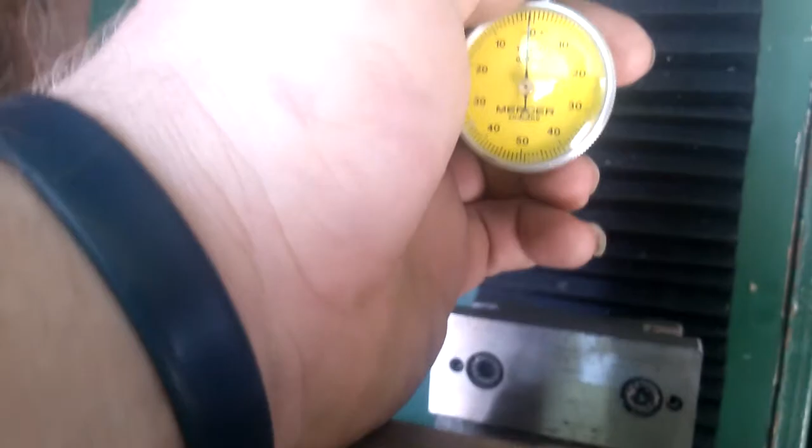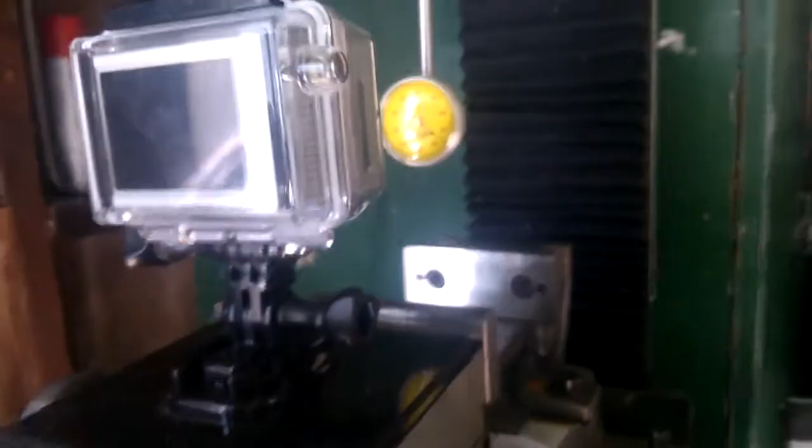But before we do that, I got to set up the vise. The vise needs to be aligned with my gauge here. This gauge is actually a metric gauge. Doesn't matter if it's metric or standard American. It'll still work as well, because all you need is to sit on 0. So I'm going to set up the GoPro, and hopefully this will get the right angle, and we'll go from there.

Okay guys, I've got this set up. Basically what you want to do is we're going to come in here. See, I got a wrench around here, that's the right size. It'd probably be better to use that. Alright. We're just going to snug that up. Just enough that it'll still rotate, but it won't move. Like it'll still allow this whole unit to rotate. It just won't move back and forth.

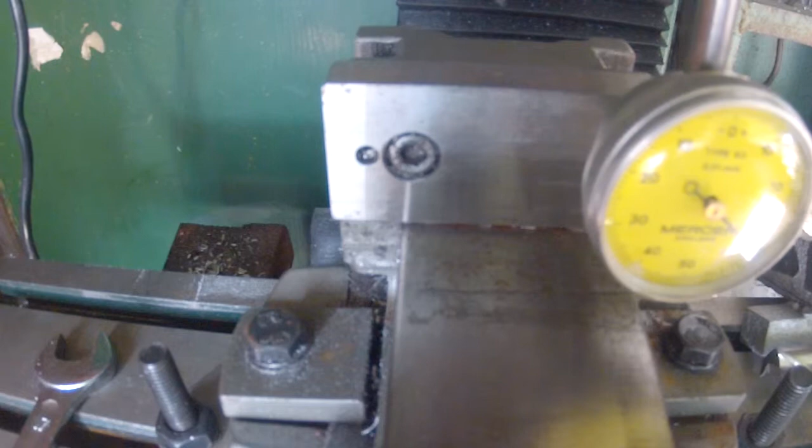So now we move into the jaw. Now I'm trying to do this around and through the camera, so please bear with me. We got 0, and then we feed across, and this is going to be really out of whack. Oh, see, we're even off the gauge now. Not a big deal. Now I'm bringing it to 0. Don't forget here, this is our locked point. So if this side was further back, it means this side is also further back, because this is our pivot point. Go back.

Okay. And I'm going to bring this table back out. And we're at 0. Alright, something you might notice, every time I come back to this point, I zero it. I don't zero it over here. It's really your own personal preference. I find that zeroing it on one spot, checking it, bringing it back, is usually the best way to do things. If you choose to do it a different way, I'm not telling you that you're doing it wrong. This is what I like to do.

Oh, way too far back. All right. Now, as you can see, we're getting really close. Just a quick thing about this gauge. It is in metric, like I said. Each one of these, like the 10, 20, that's 1/10 of a millimeter. So if I were to bring this gauge all the way around, that would be 1 millimeter.

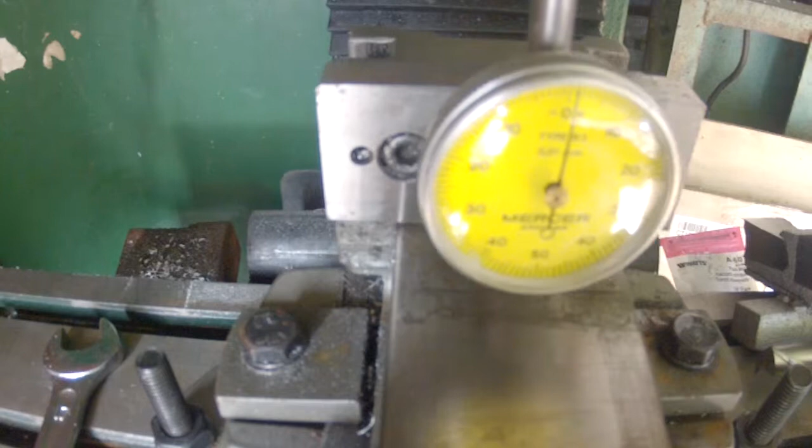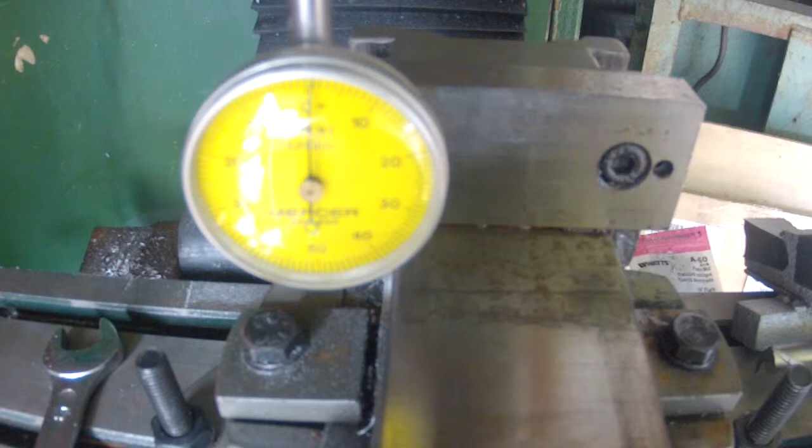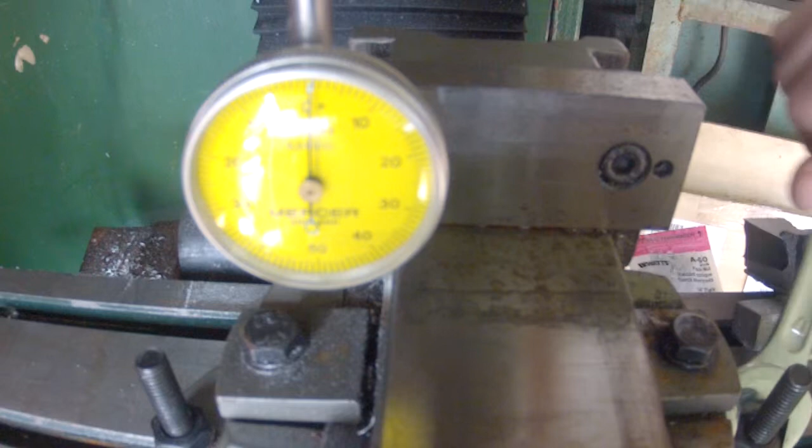Alright, we are less than 0.01 of a millimeter off from about 100 thou to 100 thou in. And this is a 3-inch jaw. So, that seems good enough for me. I'm going to put the tooling in, and I'm going to put the workpiece into the vise. Oh, actually, before I do that, not quite done here. I get ahead of myself sometimes. Alright, that's tight.

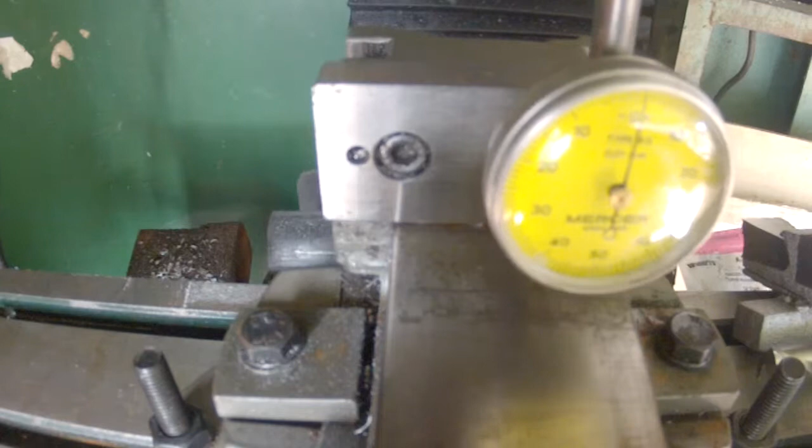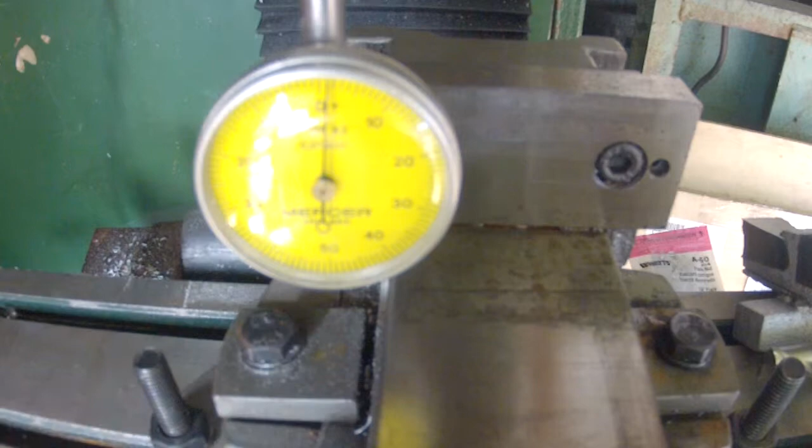That's 0. Just over 0.01. All right, it's good enough for me. Just a quick note before we get started. The 0.01 of a millimeter that I was off by is less than half a thou, just under half a thou. So, pretty accurate. I got some crud on there.

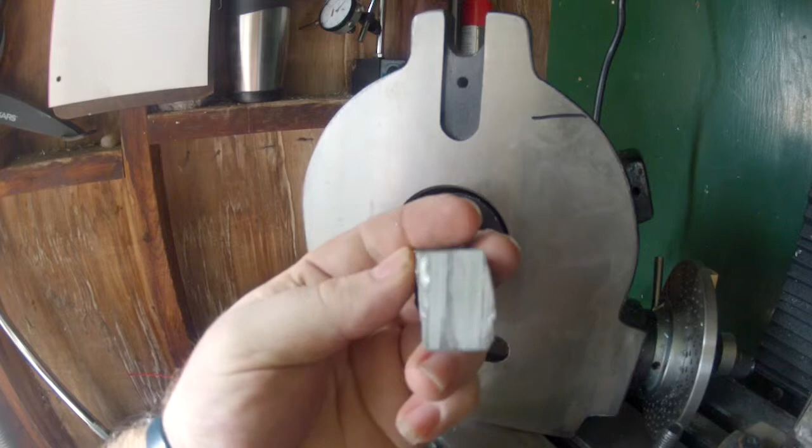Okay, so the plan today is to take a couple scraps here that I've cut off. And what I'm going to make are blocks that will sit in these slots. You know, one there, and then I'll just use one of these for this slot. These ones are pretty straightforward. All I got to do is make them the right size on the top and then flip them over, make them a different size. As you can see, maybe, I have my sizes here.

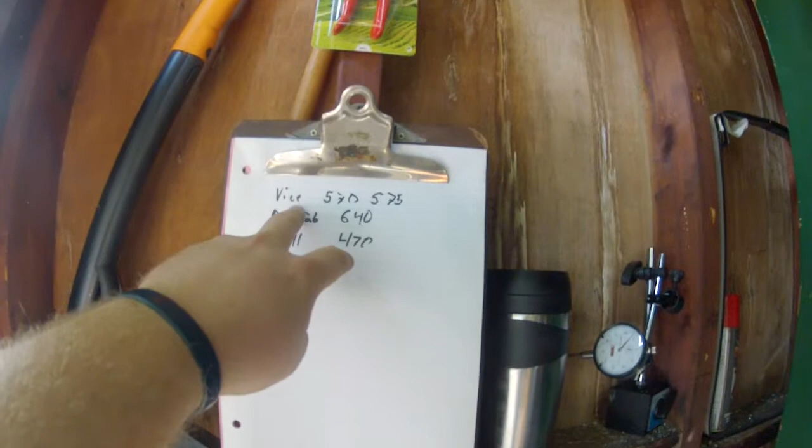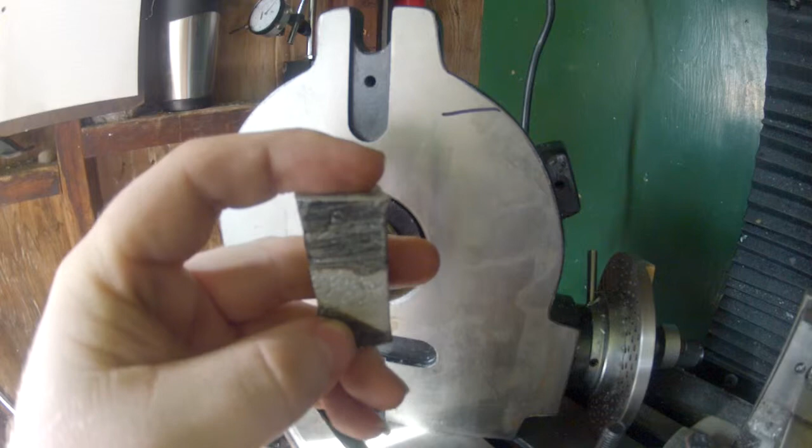The vise is not exactly straight, so I'm going to have to do a custom one for that. The rotary table, all of these are precision milled to 640 thou. And then my mill table, the width of these T-slots is 470 thou. So it'll just be a case of machining a large size for the top and a narrower size for the bottom.

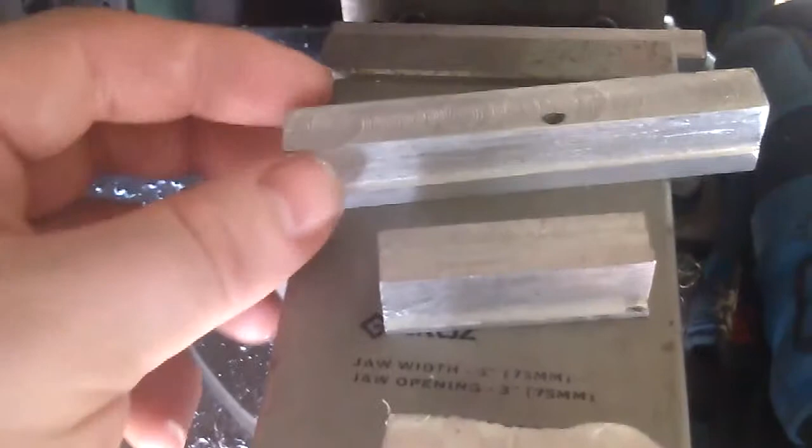Alright guys, as you can see, I've got two of them almost finished. This one is completely finished, and I'll show you over here. It slips into the slot, and actually I gotta get my little pry bar in here to pull it out. And it also fits, oh, it did fit, here we go, fits in there.

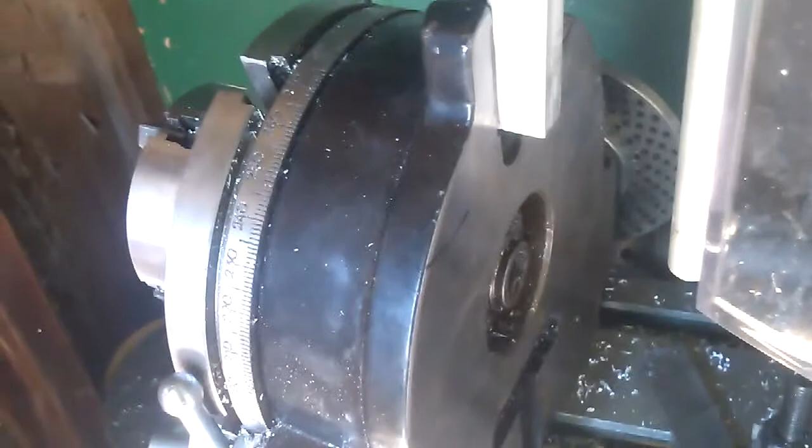A little bit of sanding just to finish it off. It looks really rough because I have filed it, and my file is not all that great, but just a little bit of sandpaper. I have some 320 emery cloth that I'll use for that. This one actually fits a whole lot nicer in these slots. It sits down in there. There's absolutely no movement. There's only maybe 1 to 2 thou of clearance, so it sits in there real nice.

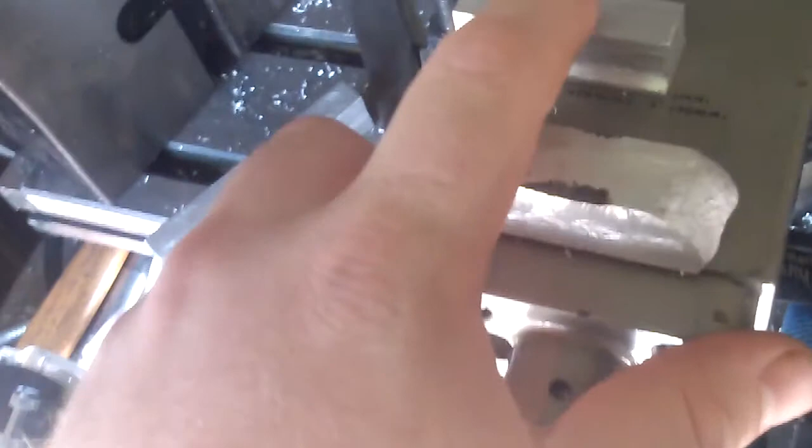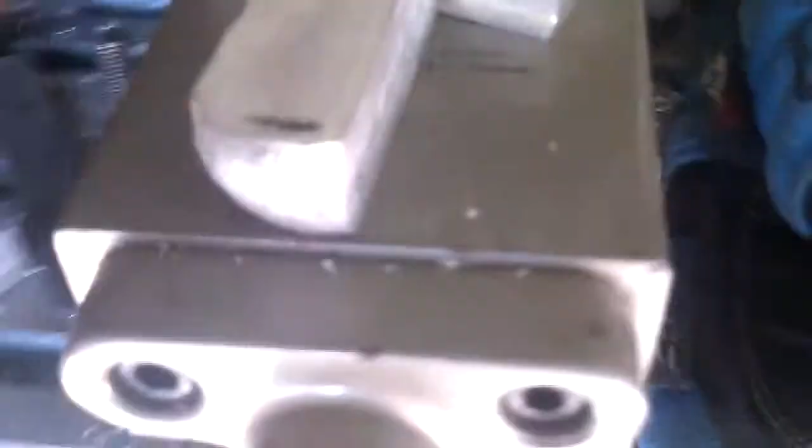Now, this guy here is going to be almost the exact same as this guy to fit in this bottom slot. This started off as a rough piece of aluminum. I've basically cleaned up the 4 sides, not the ends, not yet anyways. And this is a saw cut, that's why it looks a little weird. But as you can see, just by sheer chance, it is almost the right height.

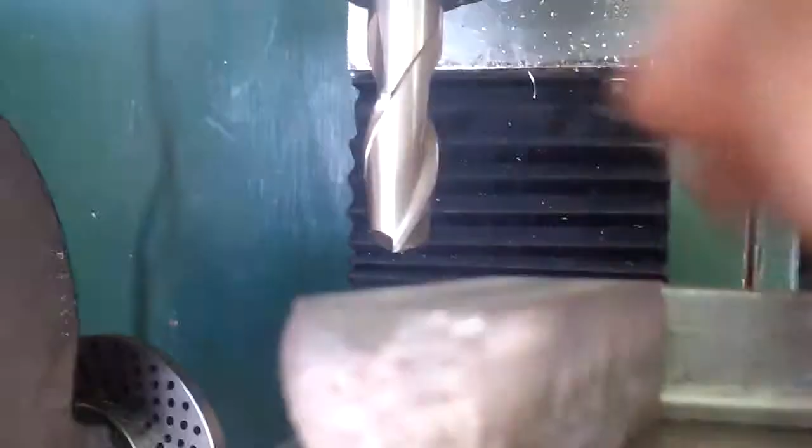Move this up a bit. You can see it's off by maybe 20 thou, 15 thou. And that's good enough. So all I've got to do is create the profile so that this piece looks like this piece. And there we go, it focused.

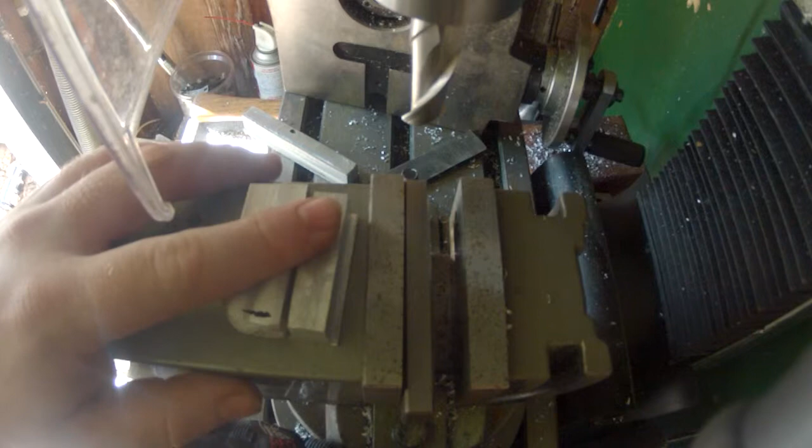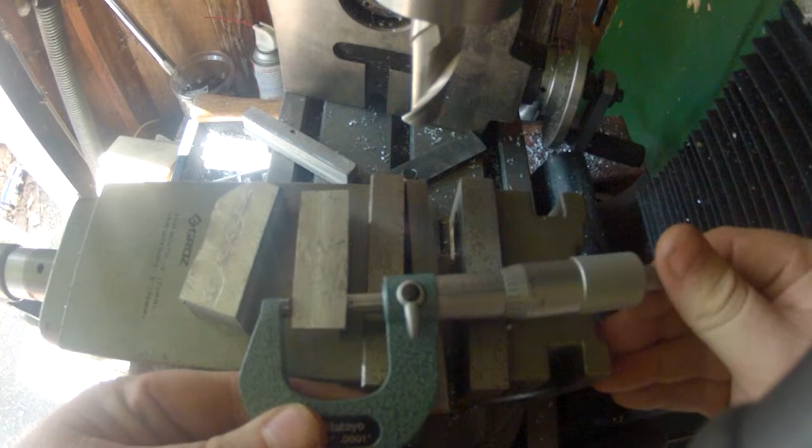Alright guys, we're going to start off by doing a little bit of measuring, figuring out what I need to do. So, I already know the heights are okay. I might put this through a little pass if it doesn't quite fit in the slot right. I'm working around a whole lot of stuff here, let's move that out of the way. First, I'm going to measure this. I'm using the micrometer here because I want to be a little bit more precise than I am usually with the Vernier. 633.5.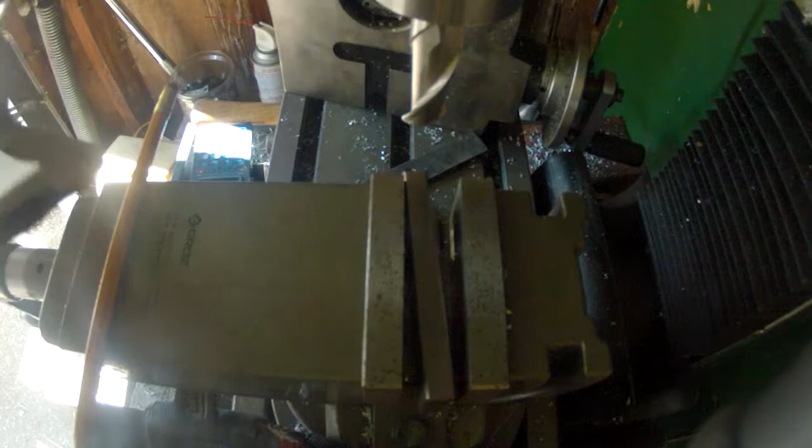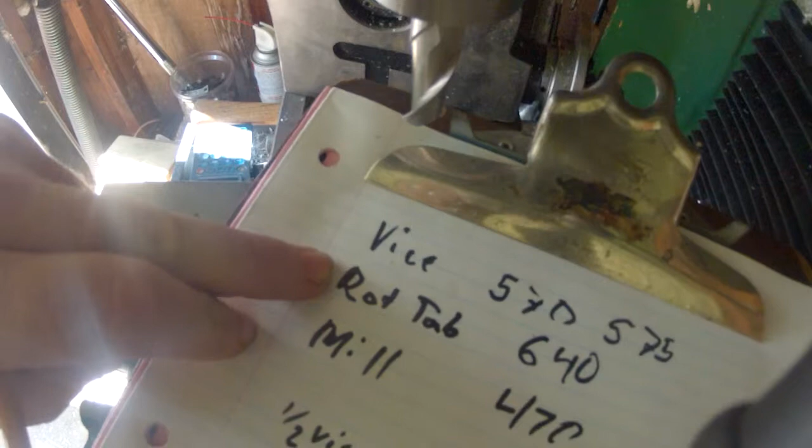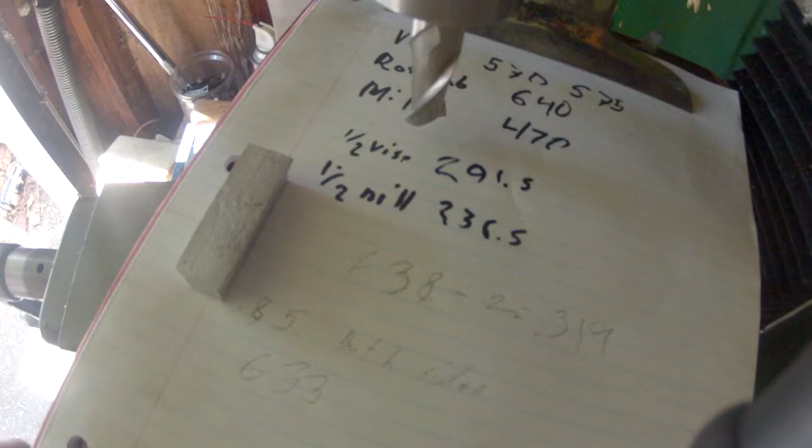And I need to do some math, so I'm going to write this down. Alright, so you can see we got 633. I know it's a little difficult to see. The initial measurement of my rotary table was 640. That was with the Vernier. And the end size ended up being just a little bit smaller. So now, where did my micrometer end up? I dropped it somewhere. Here it is. I didn't drop it. I set it down gently. We got, if I can get this thing to open up far enough, we got

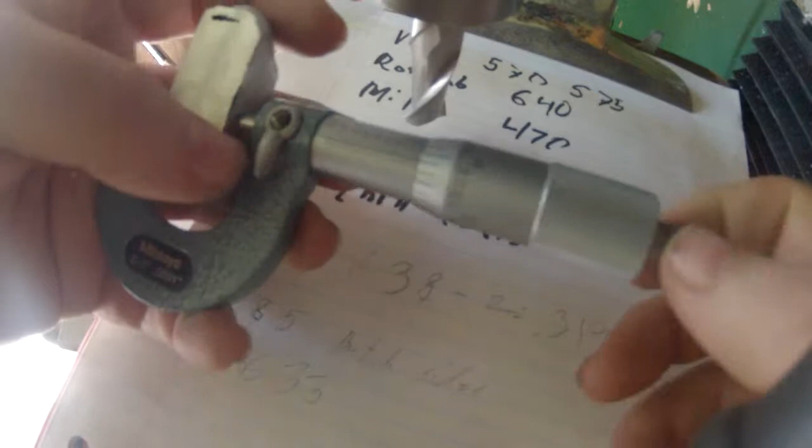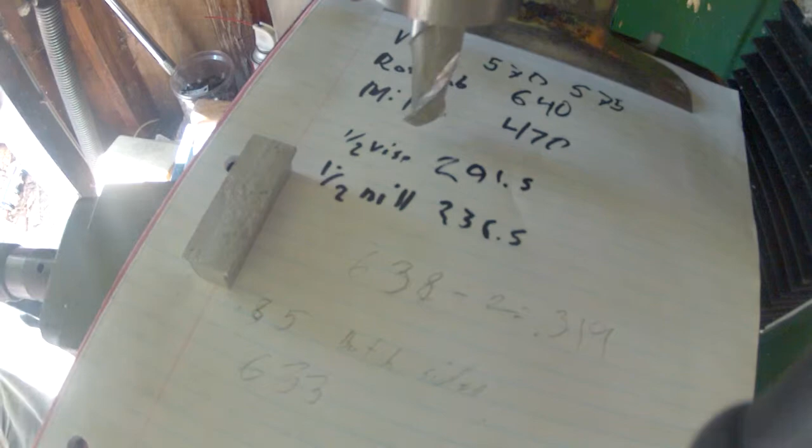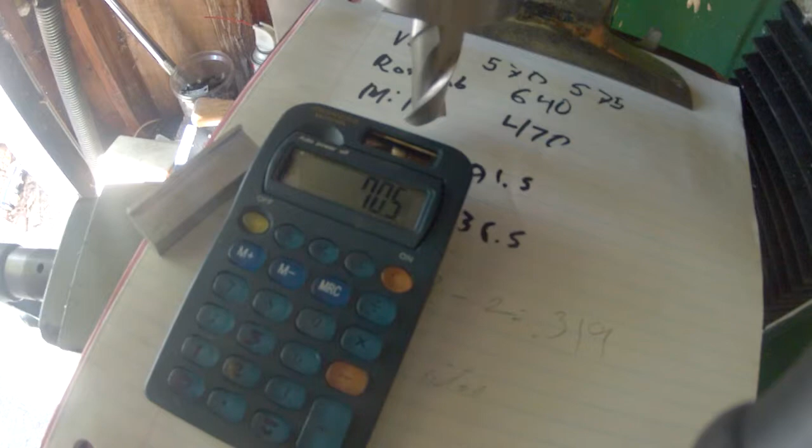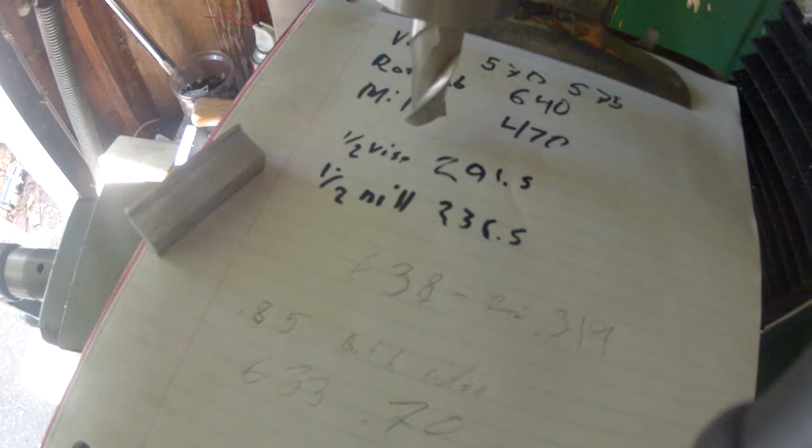775, 774. Okay, so since I'm completely inept at math, we're going to go over here. 774 minus 633, 141 divided by 2. I hit the plus, but it's close enough. So we need to take off 70 thou. And I'm going to write that down. 70. Oh, that's wrong. That should be a 0. We need to take 70 thou off of each side in order to get the large end of this piece that will fit into my rotary table.

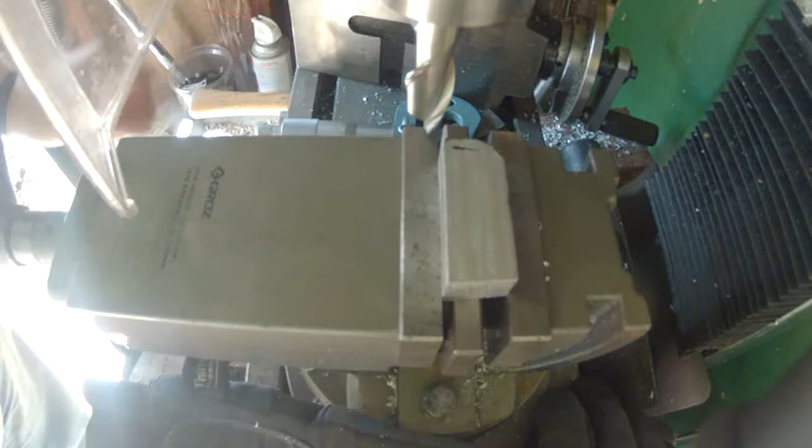Pop this in. Close that up. Now, what I'm going to do is I've got to come in and over, and I've got to make sure that this is all locked up. Okay. And we're going to come down till this is really close to touching. Doesn't need to be real close. Technically, it only needs to come down just a little bit more than this little lip right here. But I want as much clearance as possible. All right.

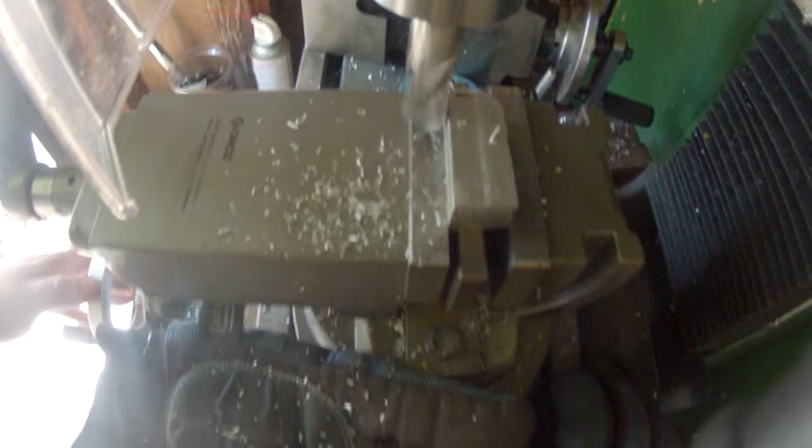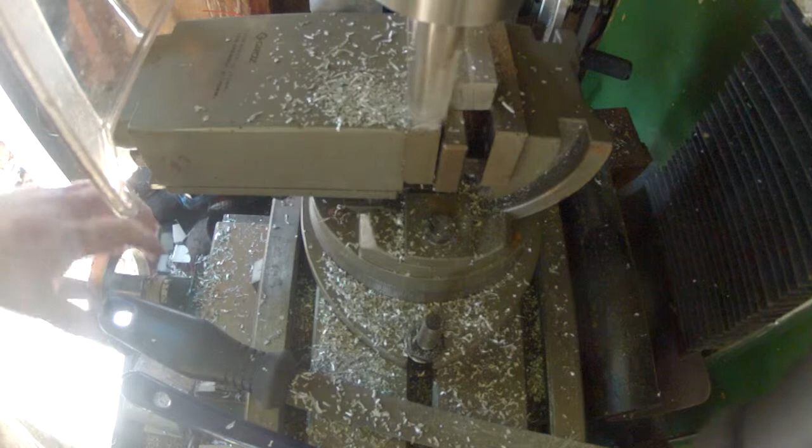Now, start it up. And we're going to come in until we just touch, actually. A little marker on it. We're just touching. Now we have to do the exact same thing on the other side. Throwing stuff all over the place here.

Alright, now we take a measurement, and it should be right around 630. Alright, what do we got? 628. That should be okay. Let's see if it'll slide in. This slot up here, for some reason, is just a teensy bit narrower than this slot down here. And it's a little loose fitting, but it doesn't actually move when it's in that slot. It does slide, but it doesn't move left or right. So that'll work just fine.

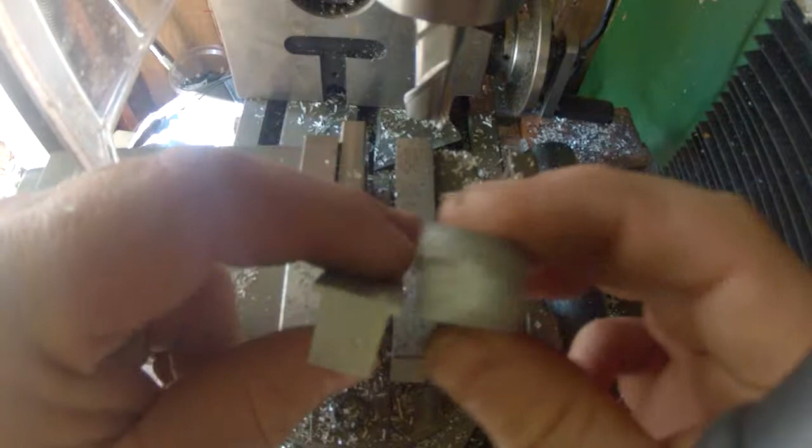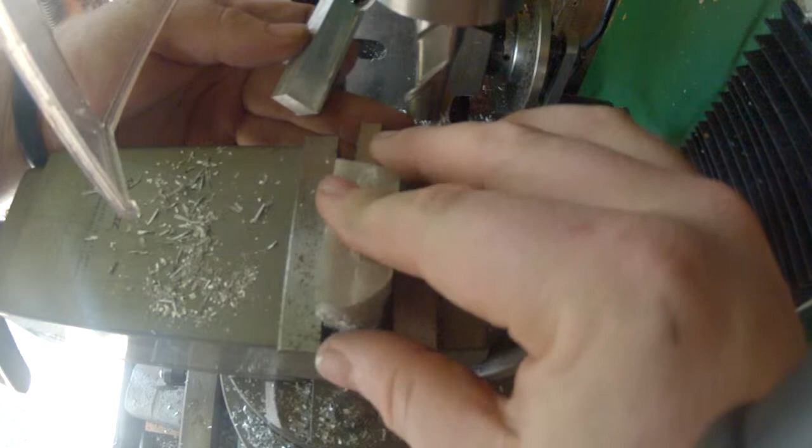Now, there it is. Now, that is that piece done. What I need to do now is the narrower spot. So we're going to do it the exact same way. This one fits so much better, so I'm going to use it for a measurement. What do we got? 463. And what do we got over here? You know, before I even look at that, I'm going to write down 463.

And what do we got on this? We got 748. So we're going to come in till we hit this.

And we're going to come in 20 thou. This will take a while, so I'm going to come back when it's almost complete. We were looking for 463. Alright, let's see how that fits.

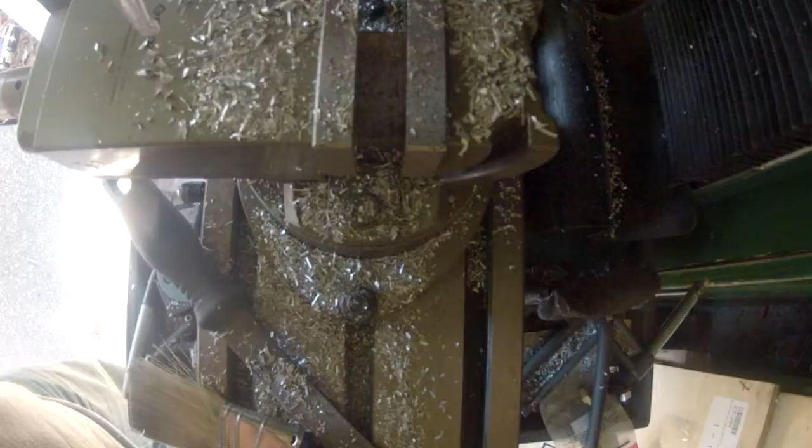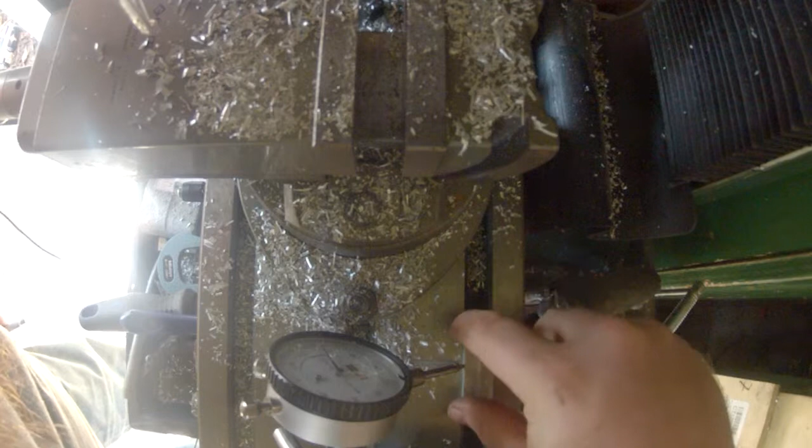See, it actually drops down in there, which it shouldn't do. It should be like a push down in. And it does move a little bit. Let's actually find out how much it moves. This isn't going to give me an exact, but it'll tell me approximately how much it moves. Looks to be about 5 thou, maybe a little bit less. But you know what? I think I can live with that. Alright.

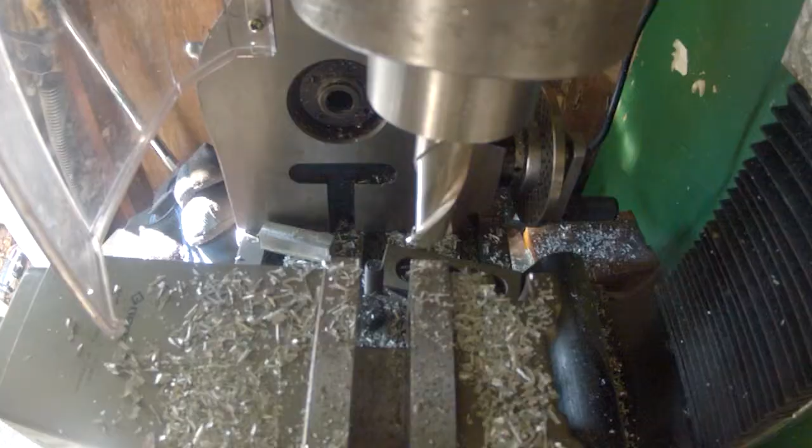There's actually one more step. If you'll notice, the bottoms of these are much different. So I gotta mill the top of this. You see I've put a little mark on there. I've got to get rid of everything up to that line. Let's clean this off a little bit first. So, let's go. There. Sits in there pretty nice.

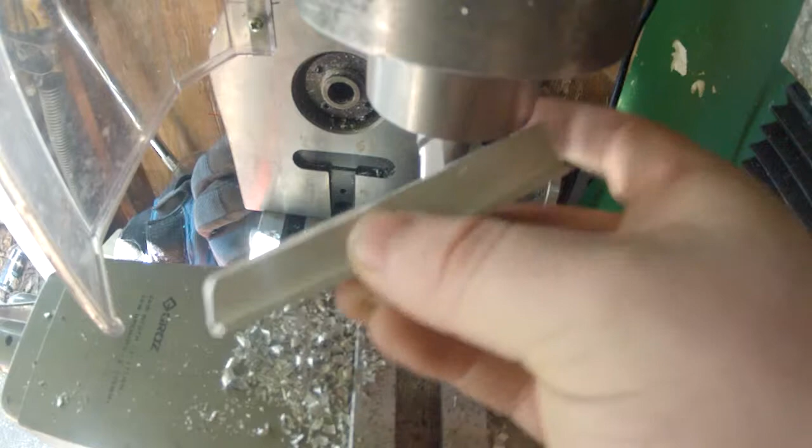Something else I wanted to mention too. These two pieces, because of the way I've made them, cannot be used at the same time. I have to use one or the other because of their differences in dimension. Not the top, obviously, but the sides. This one might be off by 5 thou this way, and then this one might be 5 thou off this way. So if I try to put them together, they're not going to even fit into the slot because they're going to be 10 thou difference.

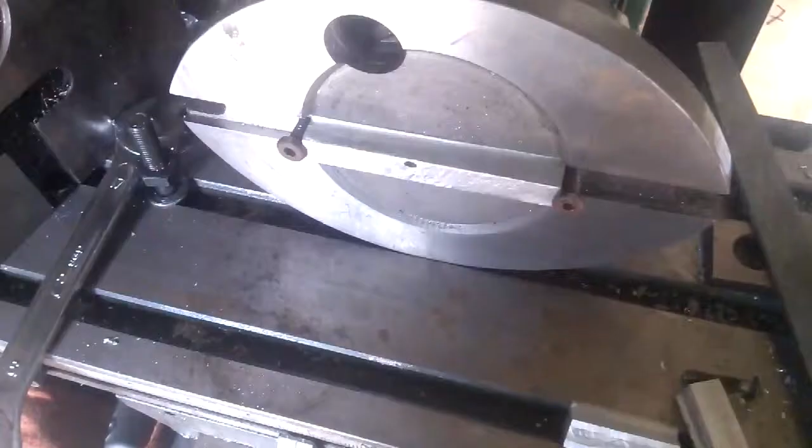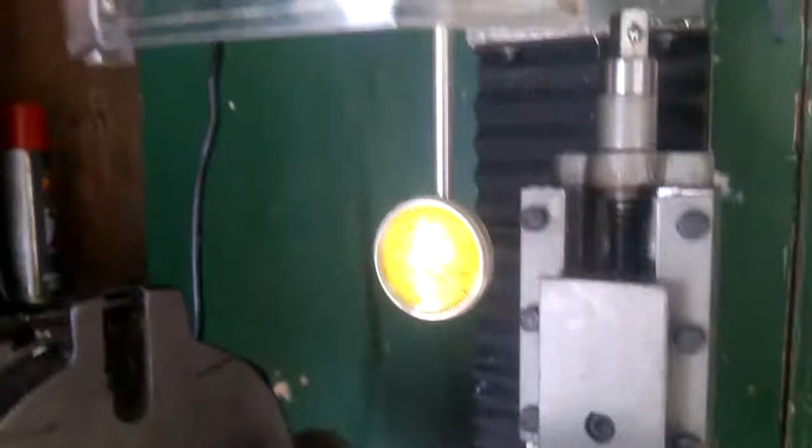Alright, there we are. It's on the bottom of my vise. These are temporary. I'm probably going to countersink this a little bit, but luckily it was short enough that it fits in between these centers. And it's actually not too deep that it hits the bottom of the T-slot in there. So I got my indicator in here. We're going to see how this works.

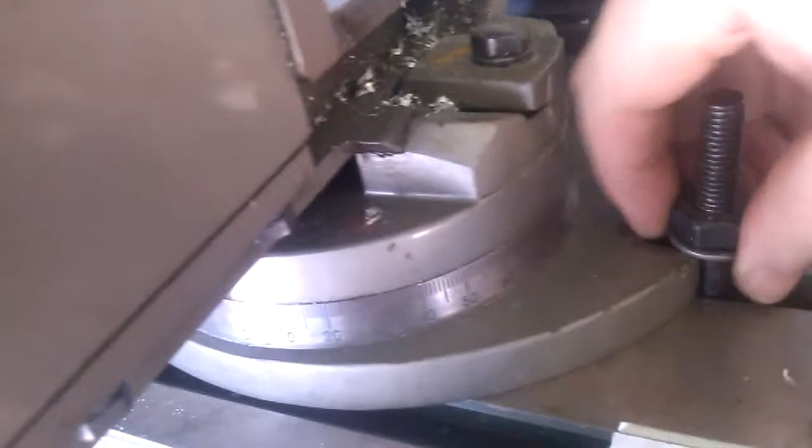Now keep in mind I'm doing this with one hand, so it's a little awkward. But it sits in there. There's no movement left or right, although I am rocking my entire mill. Where's my wrench? Right there in front of me. Put that down tight.

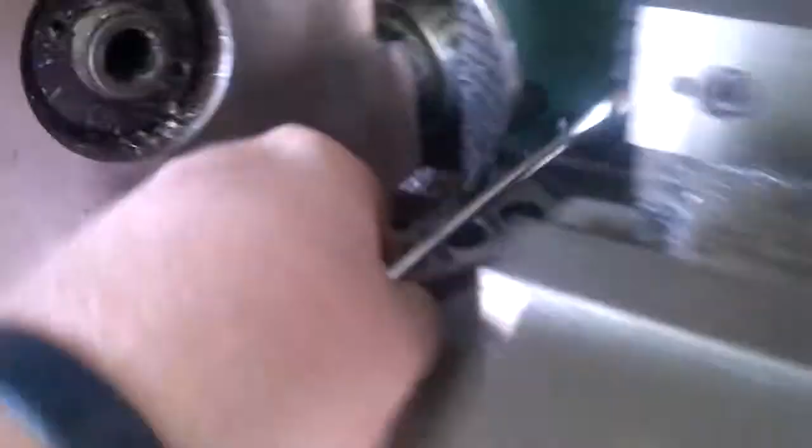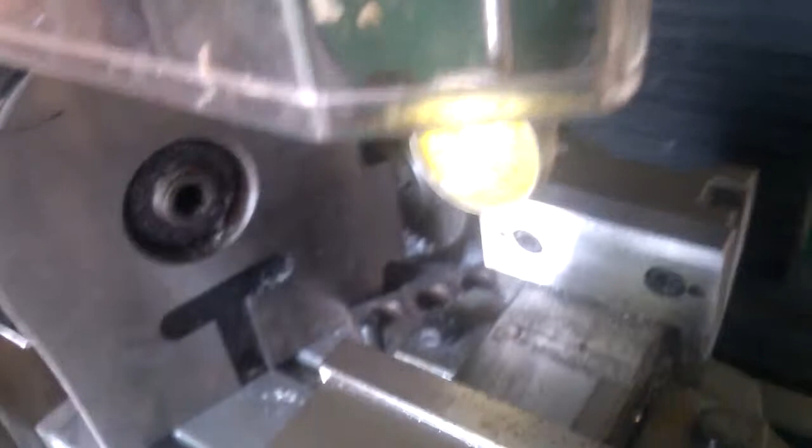And that one's tight. Now, with this bar on the bottom of this, I can't actually use these anchors to swivel it. You can see there's a ring there. What I got to do is loosen this one and this one, and that will allow me to swivel this top part without moving the bottom part. And that's how I got to adjust it now. So bring it down. Okay, that's good right there.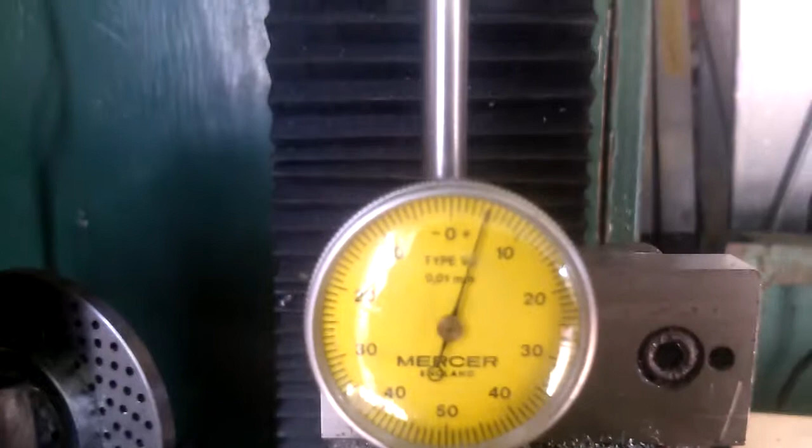Now, see if I can get a decent picture here. That's pretty good. Maybe I'll move it over a little bit so it's more in line. Well, that's about as good as I got, unless I want my camera to start falling over. Alright, gotta turn that. Call that 0. It's not exactly 0, but it's close.

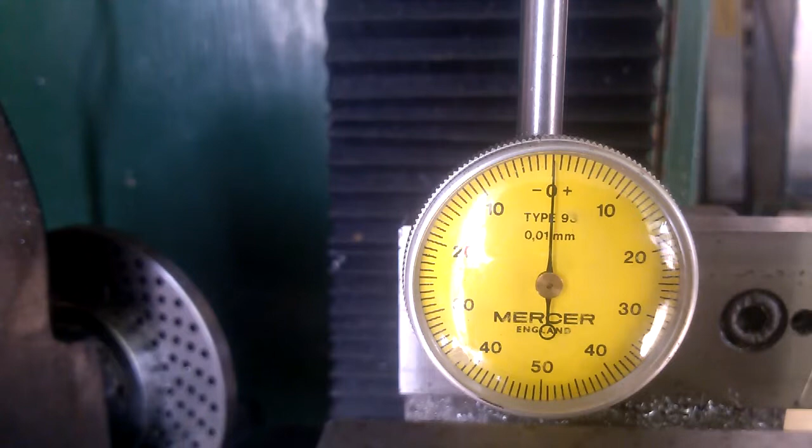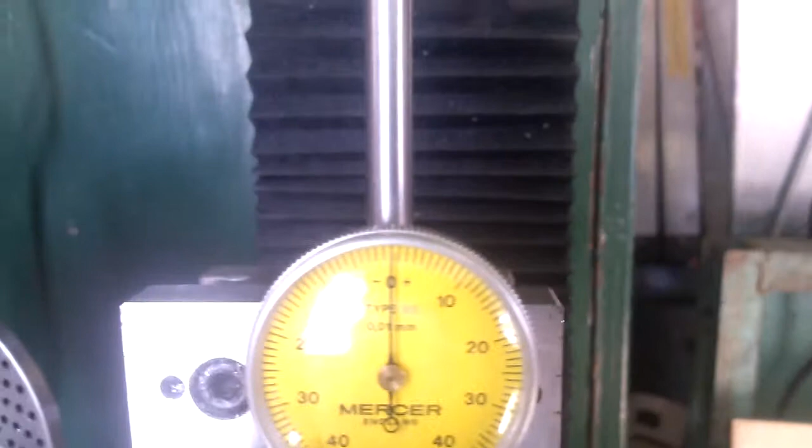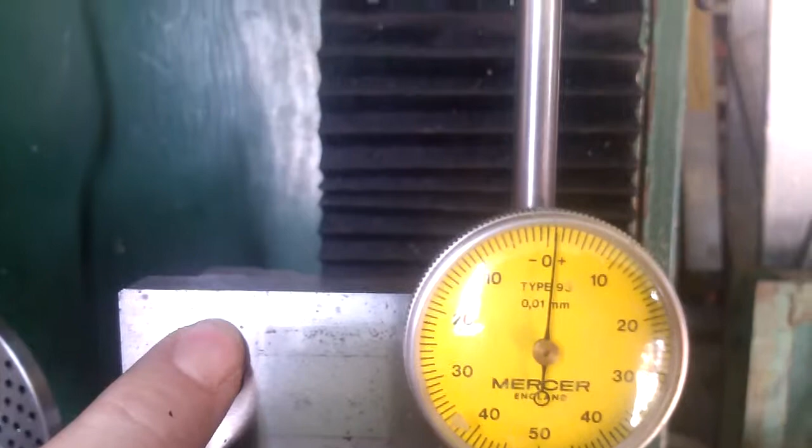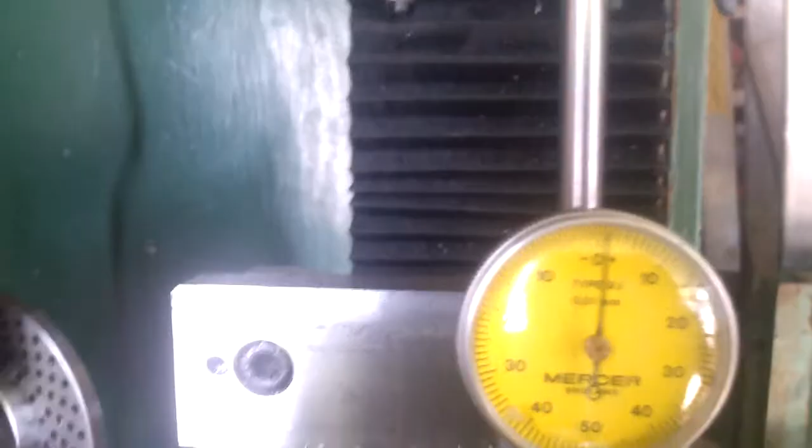And then, if we walk it across, oh, camera's going to move a little bit. I'll try to keep it steady here. There you go. Almost one side to the other. I started about here, so it wasn't quite to the edge. But I traveled that entire distance and moved 0.01 of a millimeter, which is about 4/10,000ths of an inch.

So, just by doing that simple thing, I've saved myself 20 minutes, probably not that long. But I've saved myself a lot of time every time I want to put the vise on and off. And the same for the rotary table. Although when you're using the rotary table flat, it's not necessarily...

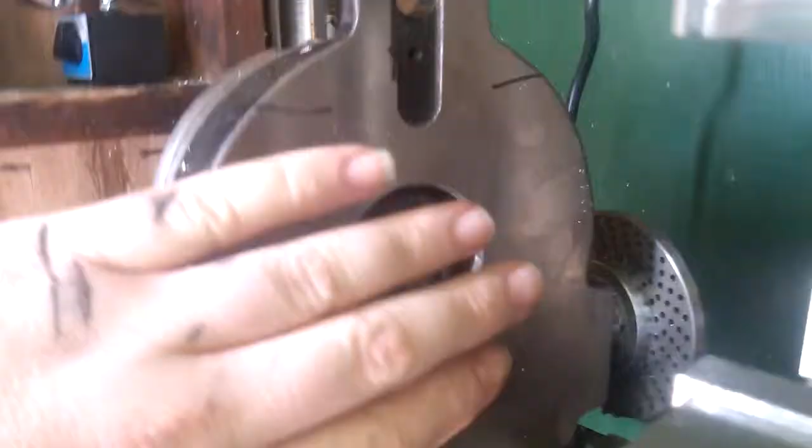What the hell bird was that?

When I'm using the rotary table flat, it's not necessary to have these lined up, unless you're doing some specific work where you need the right angles and stuff. I gotta clean this. But where it will come in handy is, here, I'll take this. See if I can get this to work with one hand without dropping and breaking something. Oh. Use this one instead, it fits a little bit better. Put that there. And then this sits right on that.

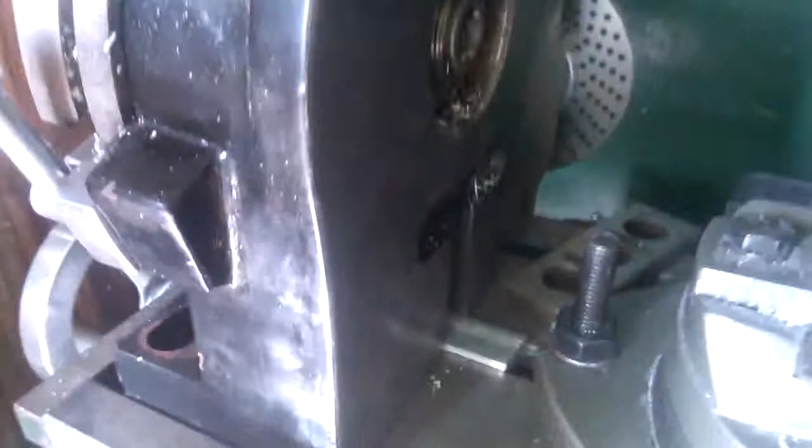And then all I have to do is lock this down, run my indicator across it once or twice, and it's going to be perfect. And a lot of this motion is because there's all sorts of crud on here and it's not quite sitting down flat. So you should make some of these for yourself. They're very easy to make, and they make your job so much easier.